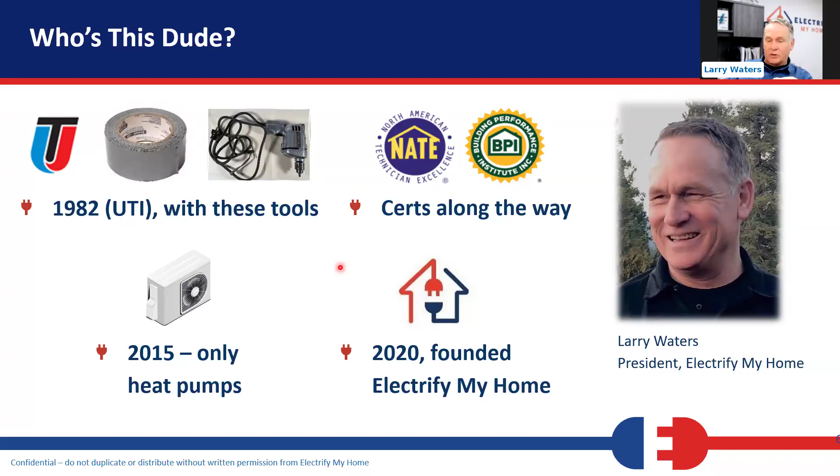I share our mission statement with every class and every customer, which is providing the most efficient, cost-effective solutions, practicing responsible load management, and training and influencing other contractors to do the same.

That's the introduction. So we're going to talk a little bit about the electrification market in California, marketing opportunities, whole house electrification planning, and the importance of designing these systems right so they work, especially in retrofits. When you're remodeling a house, it's hugely important that we look at the things that matter to the comfort and energy efficiency of the home, now more than ever, because comfort is something that's a little harder to deliver with a heat pump, but it's a completely different comfort. And then duct design, install, and commissioning - we got to be able to fit these things in there, folks.

Our Trade Pro series is designed to give you a crash course on electrification - let you know how we got here and where we're going, pinpoint enormous business opportunities, and open your eyes to better ways to serve your customers. So what's the backdrop in California? We've got an hour for this one.

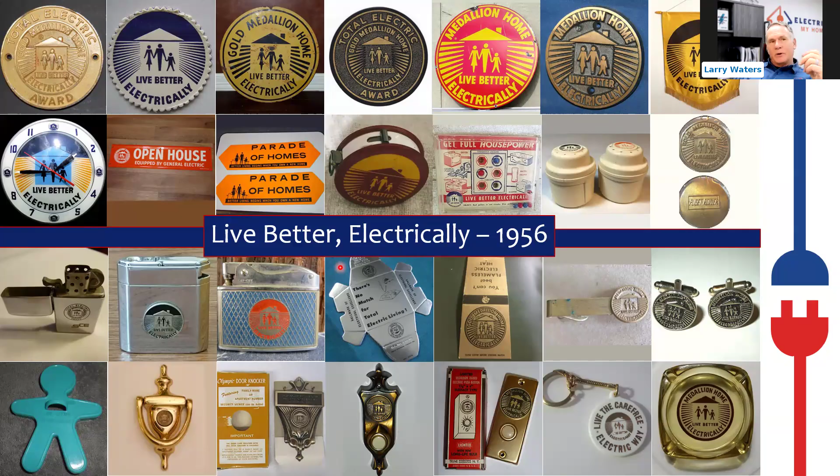Electrification has been around for a long time. There was a massive electrification movement early on in society when we were consolidating electrical systems, and these companies were building out these big electrical systems that were more than just a couple of blocks - that was kind of the first lead. Then they needed to sell more kilowatts to build out the systems, and at the same time a lot of cool stuff was happening, like vacuum cleaners, washing machines, televisions, and all these new motorized items that ran off electricity and made your life better. That was presented in the early 50s through the early 60s as 'live better electrically' - let these electrical things make your life easier.

Some of the policy decisions and things we're living through right now have been going on for a while. In 1963, the first Clean Air Act was amended. So this is not new. This is as old as I am.

All the way up to the more recent stuff, which is AB 32, the Global Warming Solutions Act in California. That required California meet or be below 1990 levels of carbon emissions by 2020. They were beating that pretty well and knew they'd get there. So in 2016, they said, you know what, we can do better. And so they set SB 32, which was to get 40% below 1990 levels of carbon emissions in buildings by 2030.

This is what's pushing electrification now. We are in the second month of 2026, going into the third month of 2026. A lot of this was happening around a time where there were some things happening in California, namely COVID, people not going back to work for a while. All these things happened to slow the pace, and now we're really up against a huge goal.

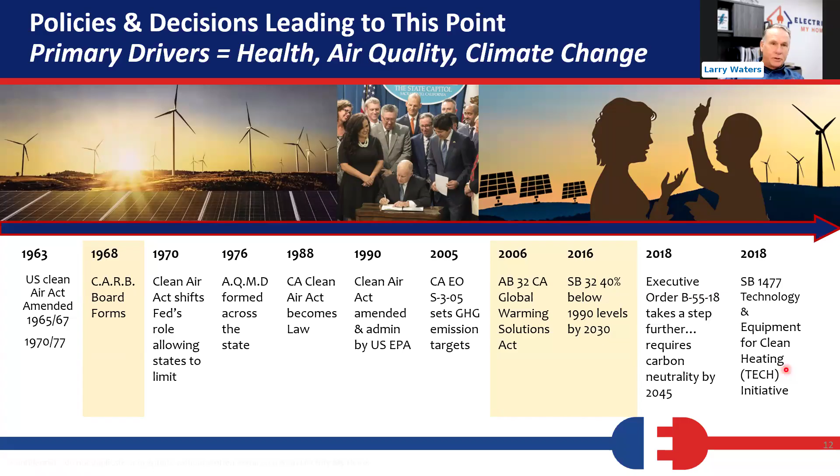Executive Order B-55 required further carbon neutrality. In 2018, SB 1477 was put through. That's the original Tech Clean California program. That's a really great program for moving this along and making people aware that heat pumps were a good option, and so they kind of did their job. Tech Clean is still around, with a lot of other people getting in the mix now, including the Energy Coalition and South Coast, and we're happy to be part of that.

We need to make sure that our customers are aware of where this is going - that gas furnaces and gas water heaters all over the entire state of California will no longer be available after 2030. And then in the Bay Area, it's 2027 for water heaters and 2029 for furnaces. So we're pushing it really close, and I'm up here in the Bay Area.

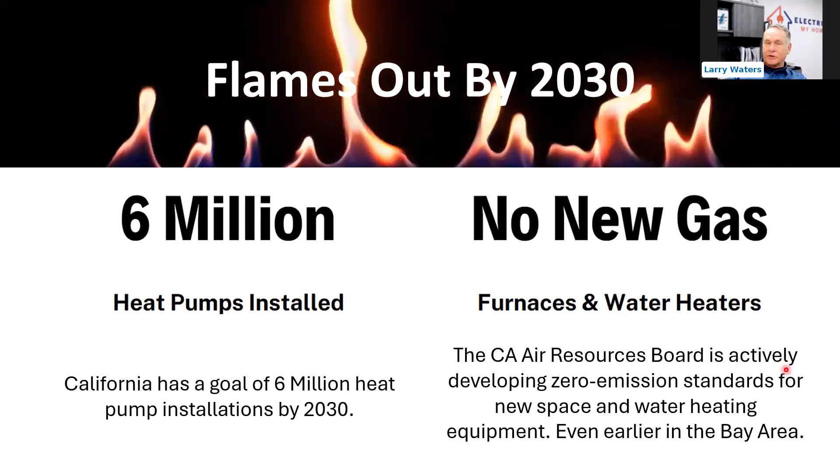All right, 70 cities in California have enacted building codes to phase out gas in new buildings, and this has been going on for quite a while. But now the whole state's going to do it. So it's going from 70 cities to the entire state.

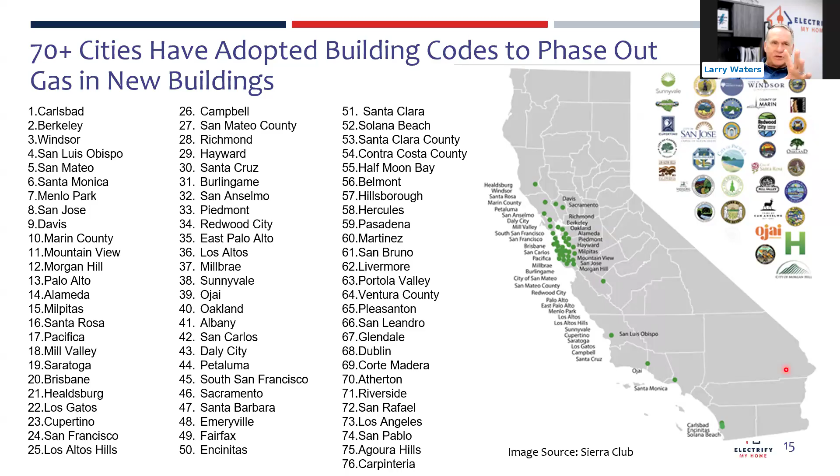So why the electric resurgence? What is it that is driving all this, right? A lot of people automatically go to the climate change thing because it's been high in the vernacular for a number of years - everything's kind of related to climate change, and this is related to climate change in the benefit that we'll get, but it's really about air quality.

So California has a lot of stuff to be proud of here. We've got Yosemite, the Golden Gate Bridge, beautiful cities, Hollywood, all the cool stuff we have. But we're also the proud owner of 8 of the nastiest, dirtiest, most polluted cities in the country. So we need to fix this problem.

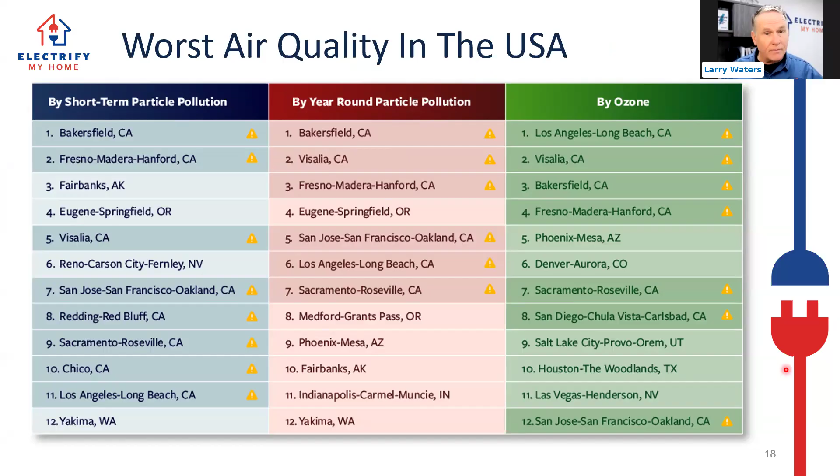And the way we fix this problem is we reduce emissions in buildings. Buildings present as much of an issue in highly populated areas as vehicles do. The difference is we can go with an electric vehicle and everybody can see you driving it around - that's kind of cool. But if you replace your vehicle with an electric one and you keep gas in your house, it's a net negative.

We can get the gas out of the houses, we can reduce more carbon, and we can increase the value of the house. Because any car you buy, as soon as you drive it off the lot, it's worth less money than it was the day you bought it, right? So by getting the carbon out of the houses, we can have much better impact and not as much drag on the grid. Also, a lot less energy is going to be used by heating and cooling homes and heating water than by charging car batteries, although we're going to be electrifying everything at some point.

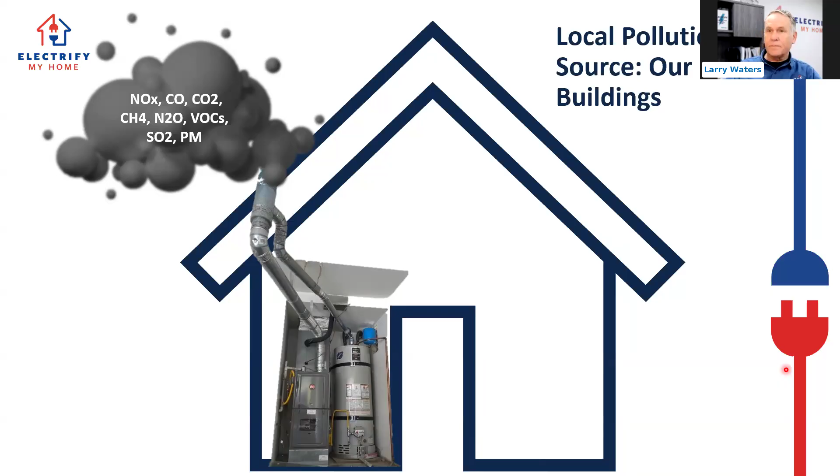All right, gas stoves - man, gas stoves are like a political football, aren't they? So I can't see your hands, but just raise your hand in your mind, visualize raising your hand, and say, hey, I've got a gas stove in my house. What are the reasons why you would want a gas stove over an electric stove?

Some of them use gas because that's what everybody has. But realistically, 70% of the stoves in the United States are already electric. Most people have an electric stove. When most people think of electric stoves, they think of that one with the coil on top that glows red hot, and when you turn it down, it still stays hot. It doesn't have good temperature control.

But now we have great technology around this called induction, which uses magnets to cook. Maybe everybody knows about that, but if not, go look at a video on YouTube about induction stoves. You'll find that they cook better. They don't produce any heat amongst themselves, they just heat up the pan. So they keep the kitchen cooler and reduce pollution like crazy.

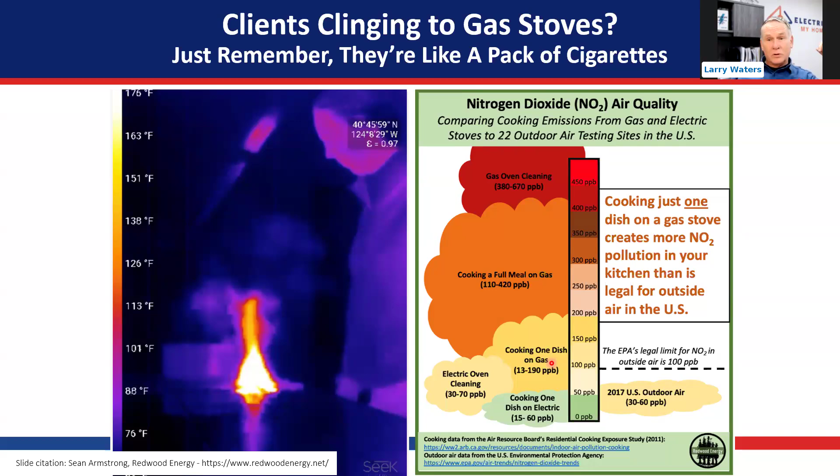One reason is that some of this stuff is heavier than air once it gets going, and it falls down to where all the little kids in the family are. Research found that child onset asthma is 40% more likely in a house with gas cooking. That should be enough reason to consider an induction stove anyway. Induction stoves are just way better, man — it's like moving from the Betamax recording system to TiVo to online streaming. It's just way better.

Okay, the tide has turned on heat pumps. Heat pump sales are now outpacing gas furnace sales. For a long time, all the way up to 2020, heat pumps just weren't a thing because people didn't realize they could even use one. Most people didn't know what a heat pump was — they lived with a gas furnace all their lives.

Heat pumps are better, and the word started getting out. After 2020 to 2022, gas furnace sales were kind of keeping pace, but a lot of heat pumps were still being installed alongside those gas furnaces. Then around 2021 and a half, heat pumps really started outpacing gas. This had a lot to do with California's TECH Clean California program and other state programs emphasizing heat pumps, along with incentives for doing so. Then it became like, hey, heat pumps work pretty good.

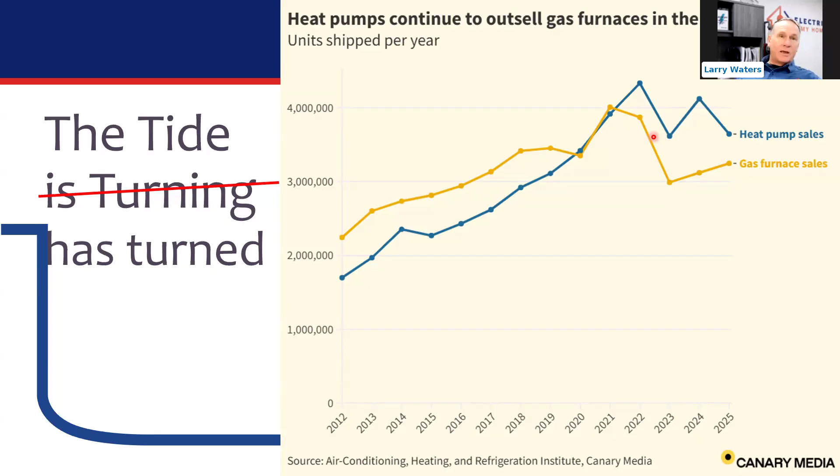Gas is no longer a good investment. We crossed that Rubicon line last year where having a combination gas-electric house will always cost more from here on out rather than a properly installed heat pump system. Now, all of these statistics assume these heat pumps are installed correctly, and unfortunately, not all heat pumps are installed correctly. So it's really important that we do this right.

So gas cost is going up, but so is electricity, which is why we need to electrify things super efficiently. Experts have been talking about this for years — since I've been paying attention back in 2015, 2016, 2017, the conversation was really coming out there. They did all kinds of research studies and found that as fewer and fewer people buy those therms of gas, the majority of the cost of that gas becomes the delivery.

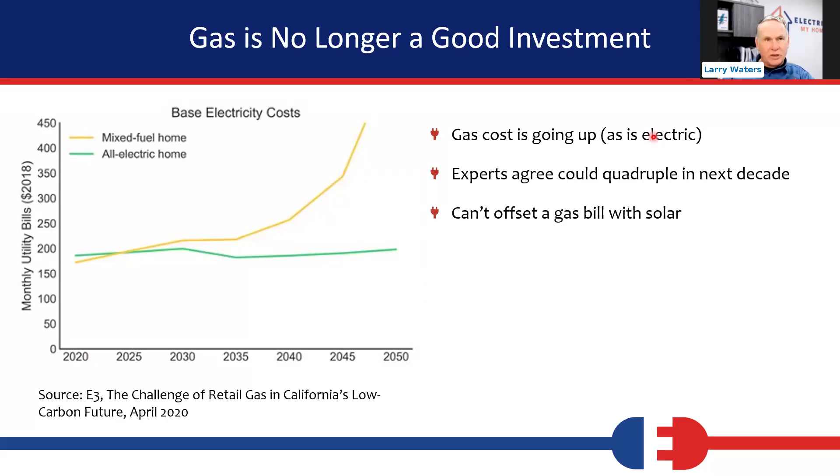When you don't buy that therm of gas anymore, we have to raise the delivery cost because the maintenance of the system isn't going to go down. It's just simple economics, folks. It's going to cost more to have gas as fewer people are buying it. You can't offset a gas bill with a solar panel. So if you put gas back into a house, that customer is going to have that gas for a while and they're going to suffer those higher prices. So we need to look at heat pumps as an opportunity in every single application right now.

Remaining gas customers are going to share the cost of the pipeline maintenance. Gas heating systems in homes will be a liability when selling. Once there's this 2030, or 2027-2029 in the Bay Area, nitrogen dioxide and nitrogen oxide regulations go into effect, it's going to be a liability when you're selling a house with gas in it. The worst thing somebody could do is say, 'Hey, I want to save money by putting a furnace in and a gas water heater,' because it's cheaper to put gas systems in. But when they go to sell their house five years after that, once the nitrogen dioxide rules are in place, the savvy buyer is going to go, 'Oh, this house has gas in it. I'm going to have to put heat pumps in here. That's going to be very expensive.'

So putting heat pumps in now avoids the cost shock of that difference in time as well. Because I can tell you what, it's going to cost less to put one in this year than it will three or four years from now, because it's just gone up and up and up. And it's not necessarily the equipment cost, a lot of it is the cost of ownership of businesses and employing people.

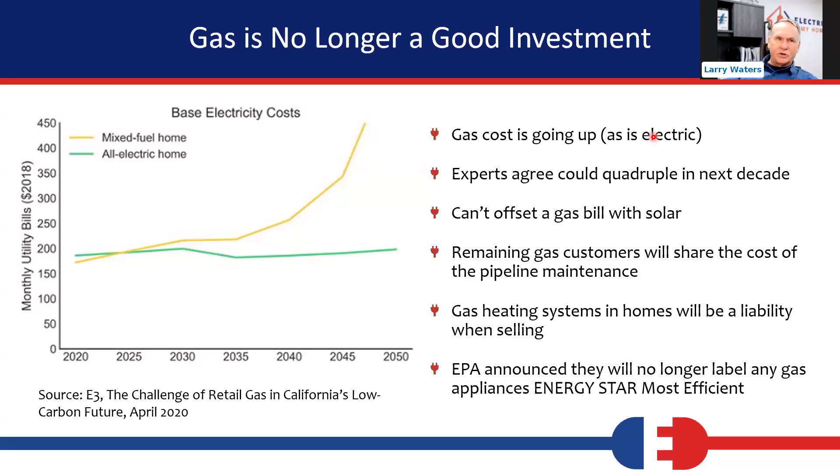The EPA announced they will no longer label any gas appliances as Energy Star's most efficient, because there's an electric solution that's more efficient. Public sector investment is shifting the conversation here.

And one of the major turnabouts in California was this Switch Is On website. They put this together a number of years ago. It's a contractor-based page. Customers can go in there with their zip code and look up all the incentives available in their area, and they can really optimize. It gives contractors an opportunity to brag about the electrification work they're doing, and it gives customers a place to find contractors that are doing it, so they don't just wing it and take a risk on somebody that's going, 'Yeah, I've never really installed a heat pump, but I've been kind of curious about that, I'll do one on your house.' Don't do that. Find somebody that knows what they're doing, has good reviews. Customers should look at the reviews - does it say my bills went down or my bills went up?

A lot of it is because of this thing called the duck curve. If you haven't heard of the duck curve, I'm going to try to explain it to you in under a minute.

The California independent system operators are making graphs all day long of how energy is going to be used during that day, so they can apply the right amount of electricity to the grid to equal what people are going to use. They do a lot of that based on assumptions around weather and patterns. We deliver the least amount of power overnight - obviously everybody's sleeping, we don't use a lot of power when we're sleeping. Then everybody wakes up in the morning, we get this little morning peak ramp - lights are coming on, things are happening in the house, start using more energy. Then the sun's coming up over the horizon, starts activating all these solar panels everywhere. All of a sudden, all the solar panels come online, and it makes it look like a drop in demand. These are big curves that the independent system operators now have to deal with - like, I got to provide all this power up to this point, and then somehow I got to rein back all that power. Otherwise, all this solar energy coming onto the grid could cause us to overpower the grid, which could damage it and cause all kinds of other problems. So their job has gotten a lot harder over this, and every year we add more solar, it causes this situation to be exacerbated.

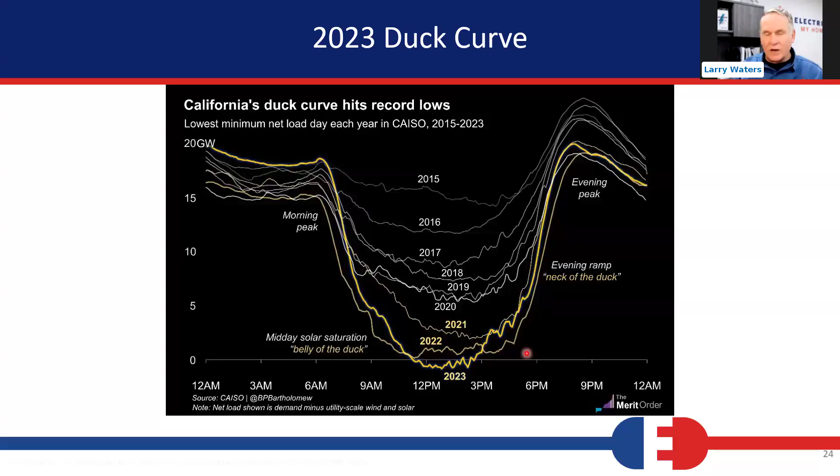So what can we do about that? It gives us an opportunity for innovation. We saw a cool thing yesterday - one of the major manufacturers is now building an inverter heat pump system with an integrated battery. Alex and I in my office have been talking about this for a few years, dreaming of building a battery that can hang on the wall behind the heat pump. Well, one of the manufacturers is now doing that.

So what can we do? We can help use more of this power during this time and reduce our use during that time, and that's going to help steady up the ramp. One way we can do that is put in heat pump water heaters. We can program them to preheat during the day when energy is inexpensive, and if somebody's got solar on their roof, it's going to come right out of the solar panels into the hot water, which is amazing.

We can preheat our water. We can preheat and cool our houses, which is counterintuitive to what people know - like, I want to save energy, I'm going to leave it off all day and turn on my air conditioner when I get home. Bad idea, because power is 30% more expensive between 4 and 9 now. We don't want to run our air conditioners then.

A better thing to do is preheat and pre-cool the house and set it back or set it forward depending on the season. If it's summer, set it up a few degrees at 4 o'clock, let the house glide through 9 o'clock, then start cooling it back down again. The only way you're going to be able to do that is with particular type systems and paying attention to the actual house, making sure it's efficient.

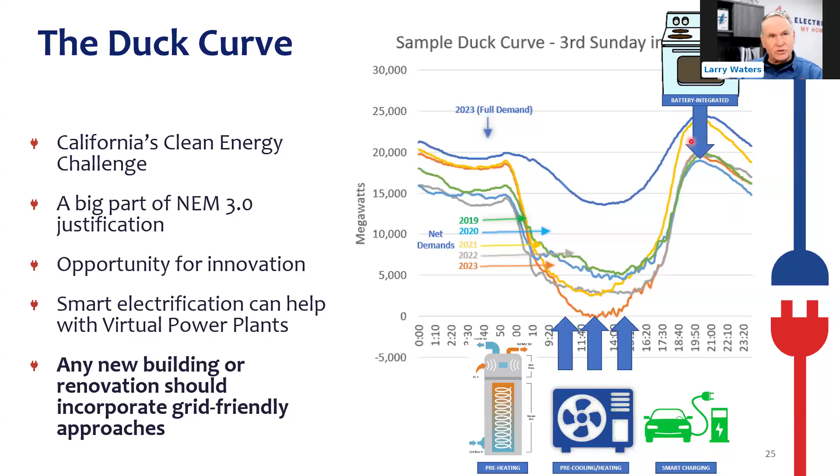And then we could do things like battery integrated stoves, since we cook during that peak hour. There are battery integrated stoves out there that have a built-in battery that runs the stove when you're cooking and charges later when power's cheap. I have one in my house - it works pretty good, pretty nice stove.

All right, what are some of the other benefits we can get from correctly designed electrification upgrades? This is more HVAC focused, like getting rid of the furnace and putting in a good heat pump. With a good, well-designed heat pump - like an inverter style heat pump system designed specifically for the house, taking into consideration the loads, like doing a load calc on the house, which I'll show you in a second - it can provide extreme comfort, like comfort you've never felt before.

My house is always the same temperature, and you barely hear the thing running. I hear from my customers all the time - oh my God, it's so quiet, my house is the same temperature in every room.

It's environmentally friendly for those who care about that - like everybody should. It's better for the environment because I don't have all those nitrogen oxides going out into the environment when I'm running that system. If I fully electrify my house, I can disconnect from the gas line, and all those micro leaks in our gas systems are way worse for the environment than just the exhaust. So by getting rid of that, we're helping the environment a lot.

They're safer because furnaces - you might look in the newspaper and see a $29 furnace safety check. You don't need to safety check a heat pump. There's no carbon monoxide that could potentially come into your house and make you sick. There's no more gas, no more flame. So it's way safer for your family.

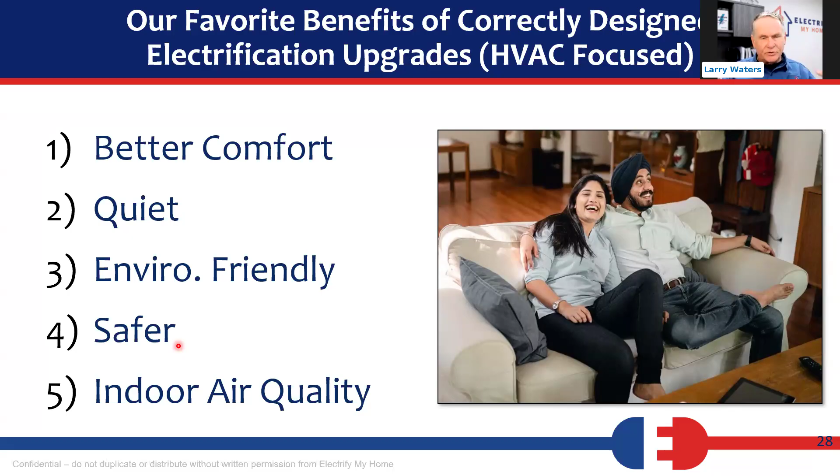And because a properly sized heat pump system runs longer, I can get extreme air quality out of these things by running them over a really good filter. Instead of having 5 to 10 minute cycles like a standard system, my system runs for an hour using a tiny bit of energy, very slowly, pulling particles across those filters for long periods of time and really getting the air clean in the house.

So here's a big question for architects and general contractors: are our new homes comfortable? In the last couple of years we've gone and looked at a lot of houses - I'm kind of a house nerd, so I've looked at a lot of new house construction just in my area. Some of the builders are doing some pretty amazing stuff.

Some of them are doing closed cell foam underneath the roof assembly, so the attic is like a semi-conditioned space - I don't have all that heat at the ceiling, I don't have all the radiation - and they're putting in more closely designed systems that are making the house more comfortable in the last few years. But up to this point, they really haven't been, especially when we have gas appliances.

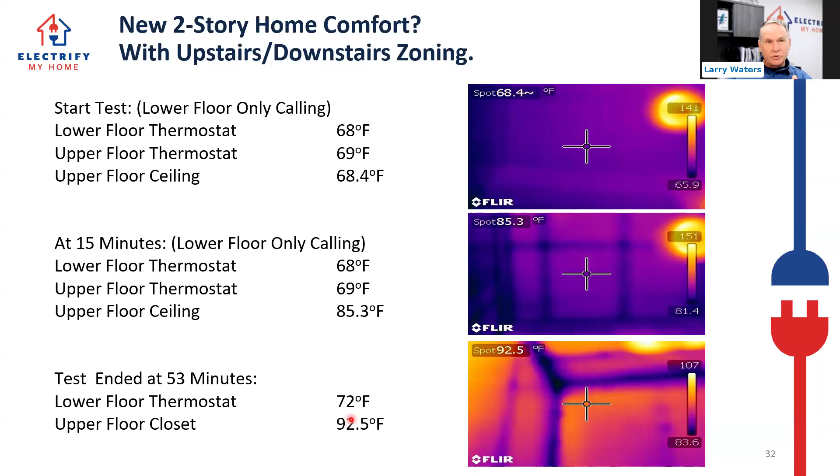It's going to heat up things that are higher. Heat pumps don't do that. Heat pumps generally heat with air that's closer to room temperature, especially if you put the right one in. It'll give you 100-degree air when it needs to, but it's also going to give you air that's very close to room temperature when we get close to set point, so we don't cause these problems. So this solution can be fixed with heat pumps done correctly.

Okay, new home air leakage. California Energy Commission commissioned this report. This gentleman named Rick Chitwood - I don't know if anybody knows him - he's a legend in home performance in California. He figured out a lot of stuff, this guy.

So what they looked at was, where are houses leaking and where's everything going? They found that the attic space is where most heat is leaving, because the heat rises and pushes up against the ceiling, leaves through the attic. The garage was responsible in several houses, and then other leakage was just around doors, around windows, wherever else it's going to leak through the vent fans, whatever. But 47% of all the air leakage in the house was going through the ceiling. So if we take care of the ceiling, we can knock a big number off of this thing, right?

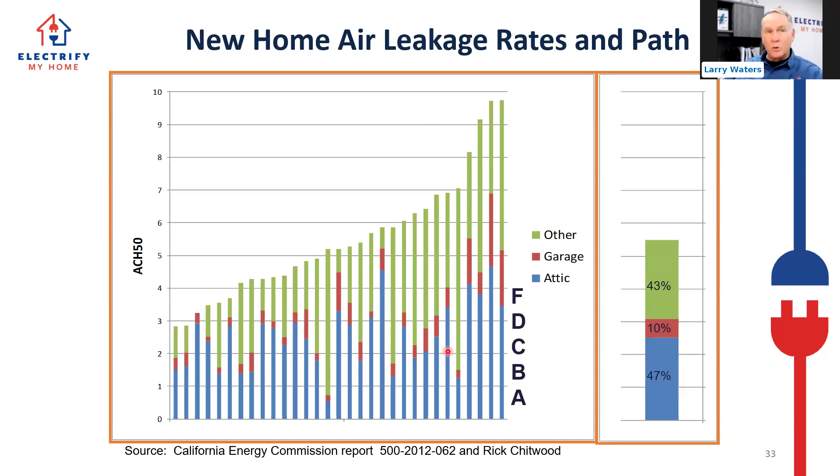And if air leaks out of the ceiling, it has to come in from somewhere else. So if we slow down the leak at the top, we'll slow down the leakage at the bottom.

All right, so this was leakage at 400 CFM per ton. Basically, they're looking at an ABC grade down here. Single family homes did have the best grade. This is 5% duct leakage. But what they found when they were starting to look at apartments and things like that, and townhouses, there was a lot of leakage in these systems, because they have different testing requirements and they're kind of connected to each other. But we can do better on that. And the requirement for 5% leakage is really - it should be tighter than that, right?

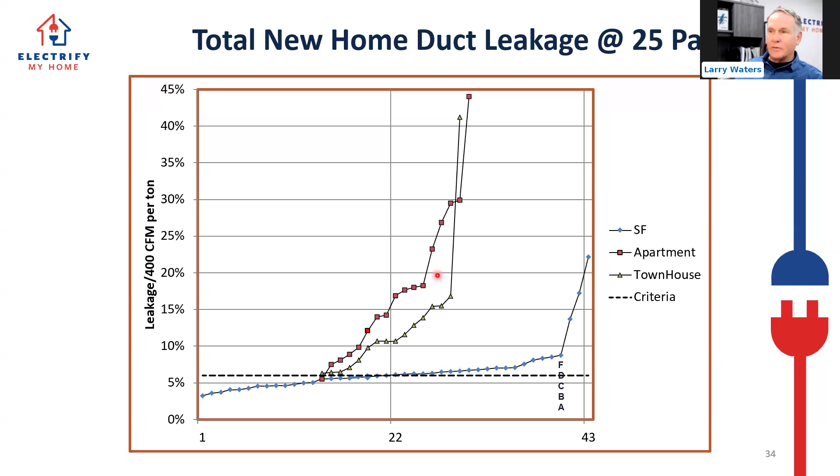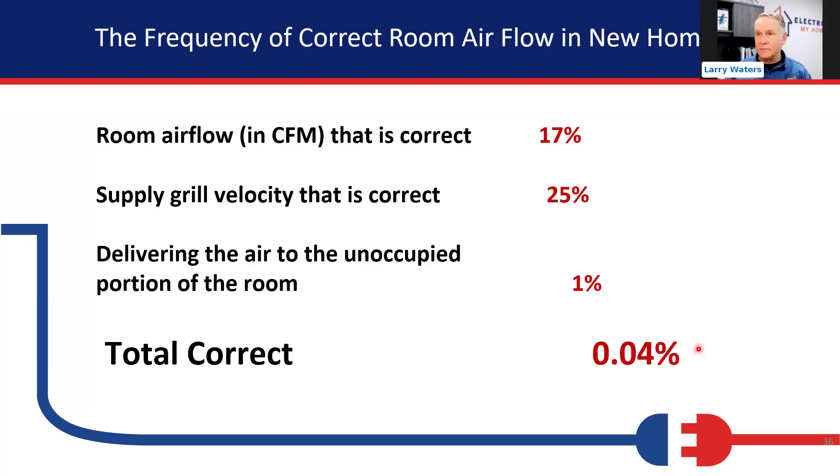Okay, so your duty to your client as a general contractor, an architect, or even an HVAC guy is you're their trusted advisor. It's not advisable, from what you've already seen, to recommend gas at this point. A lot of California right now, for the furnaces we can install, are called ultra low NOx or ultra low emission furnaces. The manufacturers only build those furnaces for a small part of California and parts of a couple other states. So when California does away with those furnaces and says no more furnaces, those manufacturers are not going to be supporting those products that are only being sold to these areas.

So by putting one of those systems in for a customer now, we are potentially setting them up for a furnace that might only last 5 or 6 years before they can't get parts for them. And boy, with those furnaces, do they need a lot of parts. We do a lot of training, a lot of contractors get in front of us. I've never heard any contractor in 4 years that we've been doing this training say that they liked low NOx furnaces.

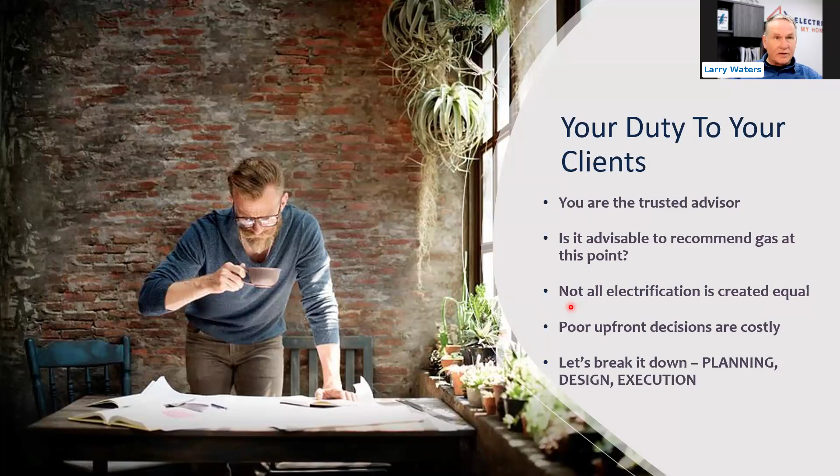So planning, design, and execution are super important. You need to learn more about these things. Keep going to these classes. Go to our 3-day class. All right, so planning—what are we going to do about planning?

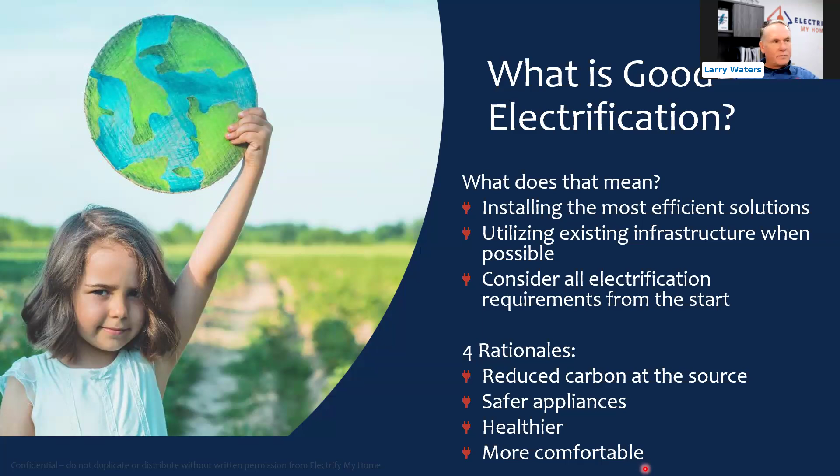You used to have a flip phone. You used to have a car without a computer in it, or without advanced cruise control. You used to have all these things, but you've changed away from them because they're safer or more efficient. That's the same thing we're doing to people's houses. We're getting rid of the gas to make it the next logical transition of technology in the home, no different from going from a tube TV to a flat screen.

Now most people are on their fifth flat screen and they're getting bigger and bigger. Do you really need an 84-inch TV? It sounds kind of cool. I don't have one like that.

Then we have to consider the electrical infrastructure. If you're an architect designing a new home, the new standard is 200 amps. But if you're remodeling and just doing a panel upgrade because you're putting in electric appliances, that's great that you want a new, safe, modern panel, but do we really need to increase the amount of power available? When you increase the power available, it requires a lot more in-depth conversation and work from the utility company, which can stall out a project for a while.

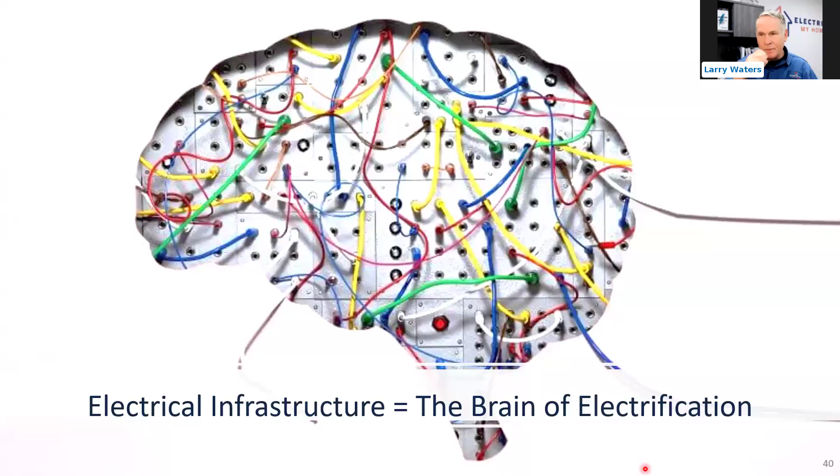So we want to look at our electrical infrastructure for what it is and figure out what we can do with it. There's a lot of power in 100 amps, a lot of it, so we can get a lot of work done.

Heat pumps are the heart of electrification. We've got the brain, which is the electrical system, and the heat pumps are the heart of it. We can't do efficient electric heating without a heat pump, but we can do very inefficient electric heating with a heat pump if it's the wrong one, installed by somebody who just pops a new unit in without designing it correctly. Make sure you use the right heat pump for the right application, installed correctly, and don't fill your brain—or your electric panel—with a bunch of garbage.

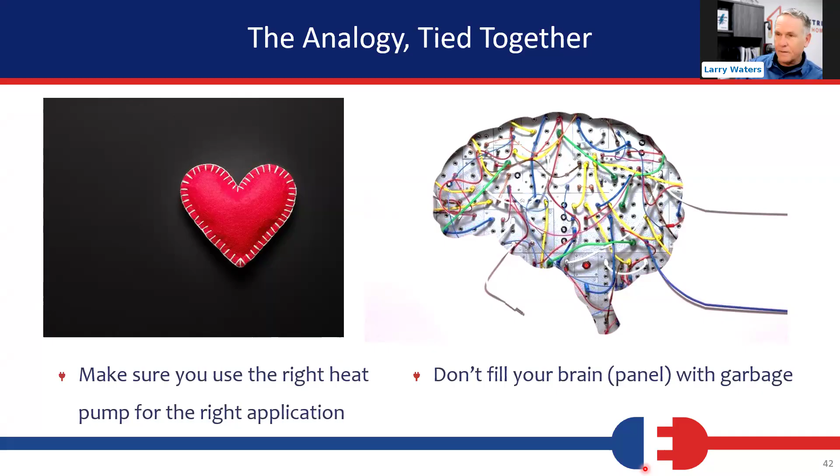Assume all homes will eventually have an EV charger. Talk to the customer about the electrification plan, which you'll help design, and determine the panel needs up front. Then consider other things besides amperage increases, like smart devices and things like that. Don't leave them with surprise panel work down the road.

We see this all the time, and we teach this in our classes: if you're just adding a heat pump water heater to an existing panel and you've only got two spaces left, what do we do? Do we take those last two spaces, yet the customer still needs a heat pump and might want an electric stove and all that? Do we do that, or what are some of the other options we can use?

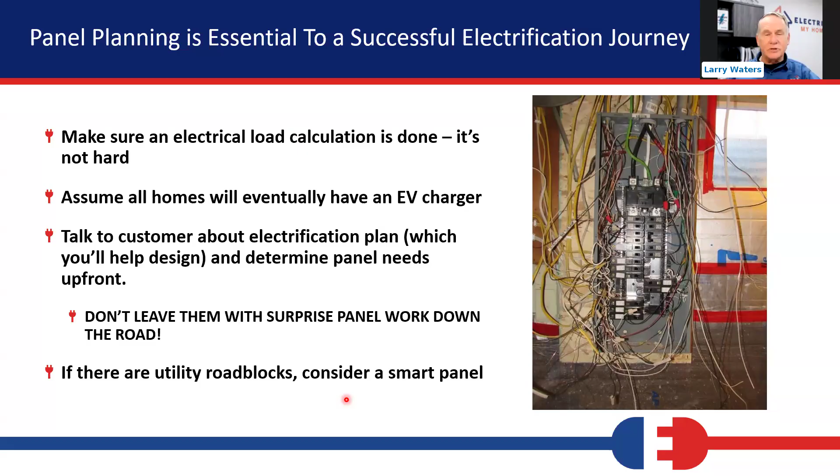If there are utility roadblocks—meaning the wire coming in from the street is extremely expensive to replace—and they're telling you the conduit isn't the right size, so you've got to pull new conduit to get the heavier wire through for 200 amps, that might be 10, 12, 15, $20,000. And depending on if you have to cut across somebody's landscaping, that adds even more cost. So there's a lot of cost involved. Consider using something like a smart panel, a switching device, or a circuit pausing device instead.

Okay, so here's some examples of some things that didn't go too well. This is a house in Richmond, California, in the Bay Area. This house started with all gas. They called a contractor out who, during the rush of contractors becoming electrification specialists - the only requirement was there was a rebate - put a heat pump in a house that only had gas before. They had a gas mentality, thinking I better put a big heat pump in to equal the capacity of the old gas system, instead of making the house more efficient.

So they put the heat pump in, and in order to get this heat pump system in there, they had to put a new panel in. The third project is when we got called in on this. They wanted a heat pump water heater and power ran to their stove and dryer, and they were getting batteries and solar at the same time. Because they were stuck with this heat pump system that cost them a lot of money that they didn't want to replace, they had to then upgrade the service amperage to the house with another new panel. So two panels in a few years.

So multiple panel replacements, oversized HVAC. When they sized the solar, they sized it to the oversized HVAC, which wasn't set up right - it was using way more energy than it should have, so they got way more solar than they needed. If they would have dealt with a company that was savvy on all of it and could have advised them on the whole thing, they could have got one panel upgrade, a smart panel, downsized the inverter to actually match what the house's needs were, and not have six breaker spaces - only two, 20 amps instead of 70 amps. Then they would have needed smaller solar, and wouldn't have needed a second panel. This customer could have saved $25,000.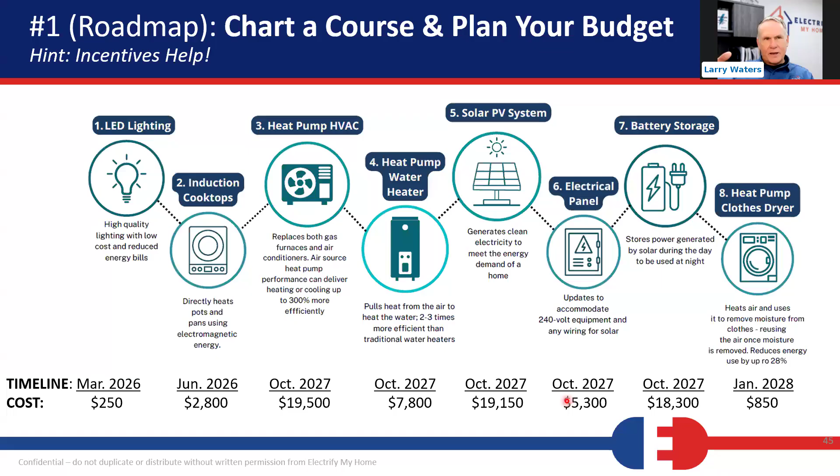Maybe they're going to get battery storage, maybe then they need a panel - we don't know. Maybe we want to put off the panel until we do some of the other work and get the process started with the utility company, do our stuff, and then upgrade the panel after we've done our work, so it doesn't break the flow.

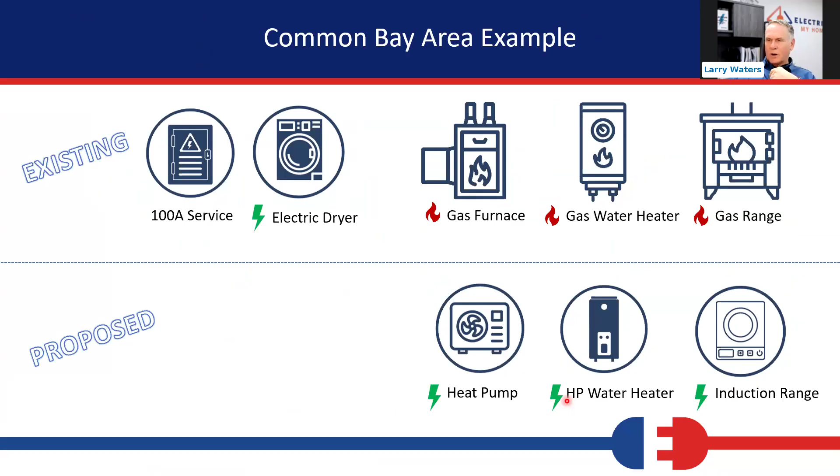Okay, so here's some common Bay Area examples, probably similar to a lot of areas down in Southern California as well. 100 amp service - they have an electric dryer and everything else is gas. So they want to put in a heat pump, a heat pump water heater, and an induction range. So what are we going to do?

So we keep the panel in place. We specify a low capacity heat pump split, change out the dryer with a heat pump, put in a heat pump water heater, or split the dryer with the heat pump water heater - take one circuit and use a splitting device and run both of them off of one circuit. They just can't both run at the same time. There's cool devices out there for that. Pre-wire for the future range, tell the customer to save up for the solar or the EV and eventually get a new panel. That's one good scenario.

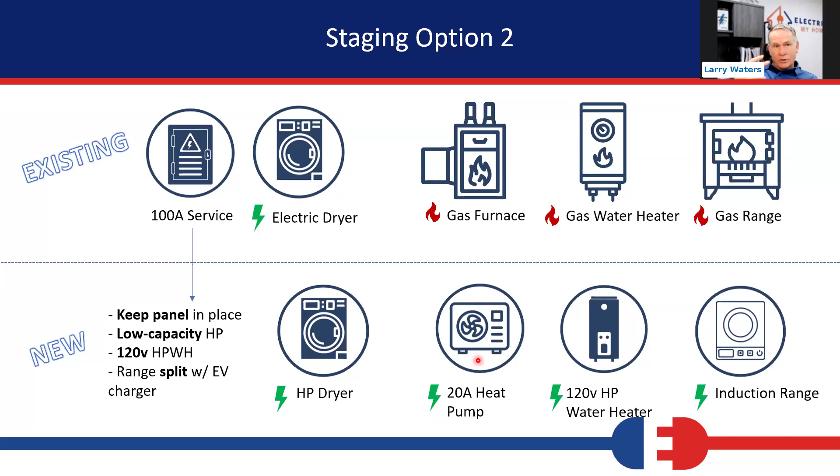There's another option, same thing. Maybe they're going to go with a heat pump dryer, and we're going to put a heat pump in where it's a 20 amp breaker that runs the whole machine - the outside runs the inside. So I only need two spaces, two very small spaces on the electrical panel.

Maybe I do a plug-in water heater because I don't have enough space in the panel, so I put a 120-volt plug-in water heater in. Just make sure you size it right. Then we can get the induction range, or maybe they want to go with the battery range. There's a lot of different options where we can keep the customer on their existing 100 amp service by installing these low energy appliances. We also call this watt dieting, if you haven't heard that.

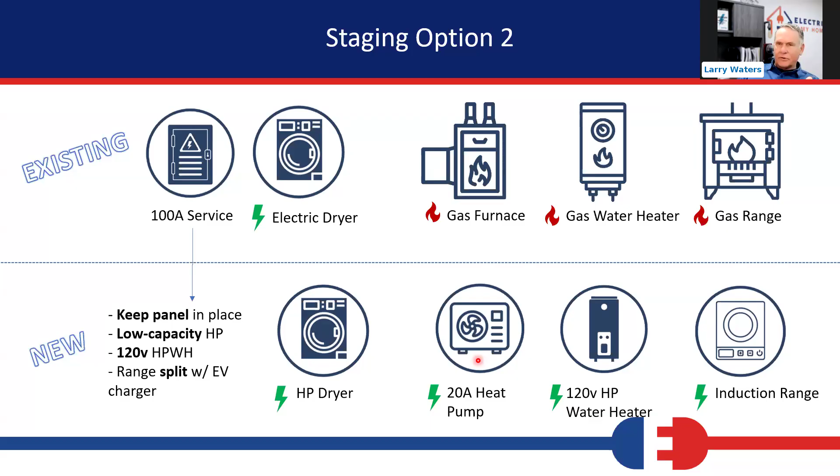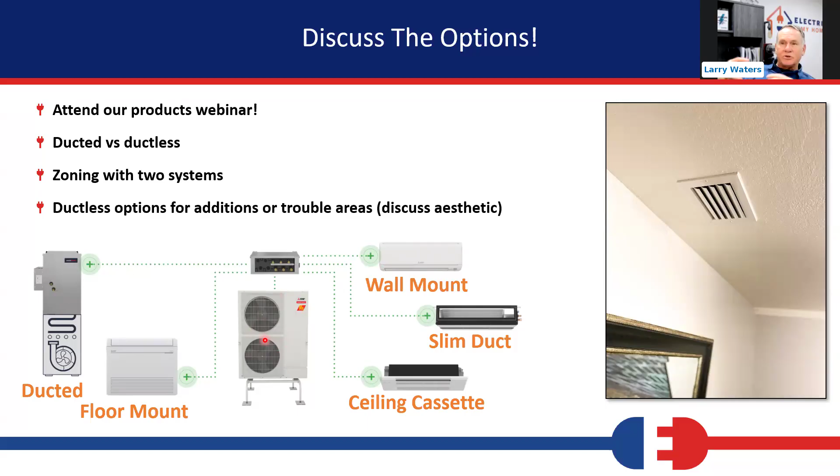Avoid the value engineering, man. The value engineering is killing this stuff.

Include the HVAC design early on. I know there's more regulations about this now. I remember when we'd go out to a house, the GC would have the floor in, and he'd call us and say, come give me an estimate on air conditioning this place. The way the house was being built, there was no way to get ductwork anywhere, and we had to scrimp—there was no way to get the correct airflow to the rooms. We need to engineer this into the design of the house to make sure we have enough space, but also enough space to get enough air into each room.

These are long-term decisions. I've been limited on projects by an interior decorator saying you can't put that grill there. I said, well, would they rather have that grill not be there, or be uncomfortable in this room because it's the only way we can do it? Architects on the call have probably heard that—I don't want to see that grill where the air goes in. Well, you can put it way over in the corner, but that's too big, I need a smaller one. You put a smaller one on, it affects the way the system operates, it costs way more to operate, and they're not going to be comfortable. Then it's, oh, I have this beautiful home, I can't see any of the stuff, but the place doesn't cool down.

Thermal comfort and health outcomes are equally as important as aesthetic comfort. So in other words, you're going to have to see some of this stuff. You can hide some of it better, but reducing return air sizes because you don't want to see a grill somewhere is a really quick way to an uncomfortable, energy inefficient home. We need to get that message across.

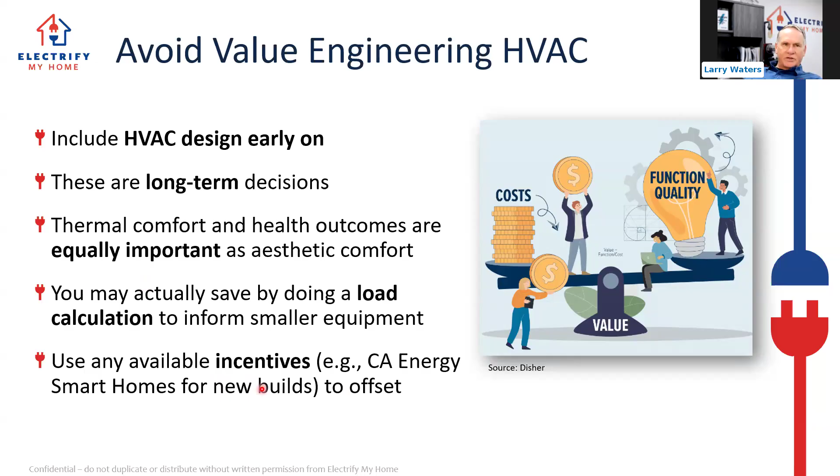These are available in all sizes. They're quieter, more efficient potentially, and more discreet. And they're gonna meet the requirement of smaller lot lines or city regulations about space on the side of the house. We work in a lot of really heavy dense population metro areas, and those metro areas have rules around these things, not only about size and distance to the property line, but also sound.

But these systems are going to be more apt to turn on and off more. We want systems that are going to run a long time and use a little bit of energy once they get the house cool or warm. So traditional systems - you might be talking to a general contractor, and you might use a subcontractor that just likes to put basic stuff in, so there's a little bit more money we can pull out of the job. That's great, let's just upsell the customer on a good one and then have a little bit more money off the top of that, right?

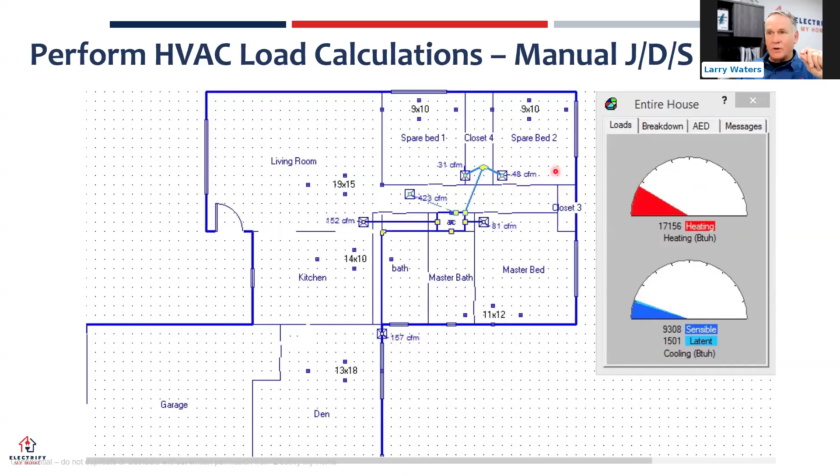If you look at these two rooms, they're both 9 foot by 10 foot. This is a big deal - one of these rooms needs 50% more air than the other does. Why is that? It's not because of the way the house is facing, it's not because of the window, it's because this room has two outside walls. Mother Nature is on two sides of that room, so it needs more conditioning.

So what most HVAC contractors are going to do - and I know this because we ask the same question in all our classes, and everybody guesses wrong - these are HVAC guys taking time out of their career to learn more, and they don't understand this basic thing. Some do, but most don't.

If I put the same size duct in both of these rooms and deliver the same amount of air in both, which is usually what happens if there's no load calc because they're going, 'oh, this is the same size room as that one' - if I don't have the ability to put 50% more air in here, or I put 50% more air in here when I don't need it, it's going to cause conditioning problems. Either this room will over condition, overheat and over cool, or this room will under condition.

So it's really important that we put these in here with little valves on them to dial that in. That was that statistic I showed earlier - only 17% of the houses had the amount of air coming into the room actually matched to the load calc. That's crazy. We should be at 85%.

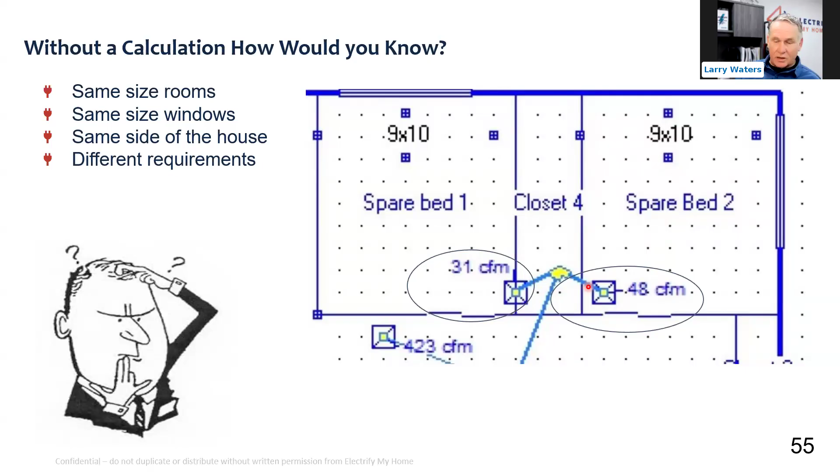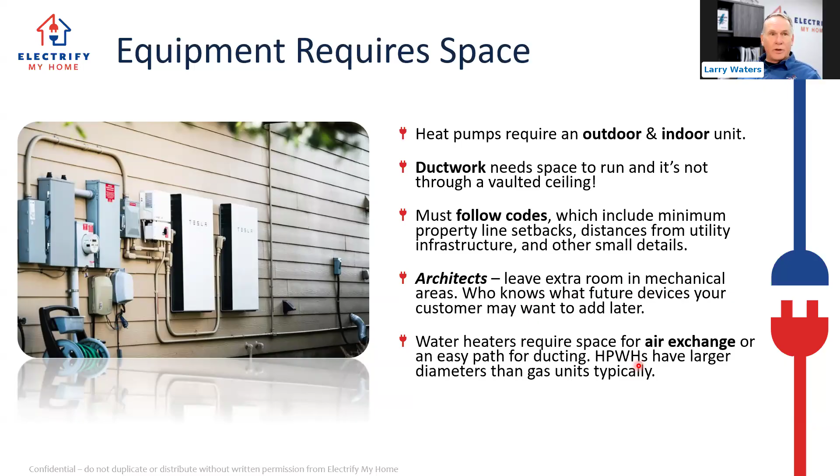So we need air for air exchange. If you're putting one on the inside of the house on the first floor of a slab house, then we need to worry about it.

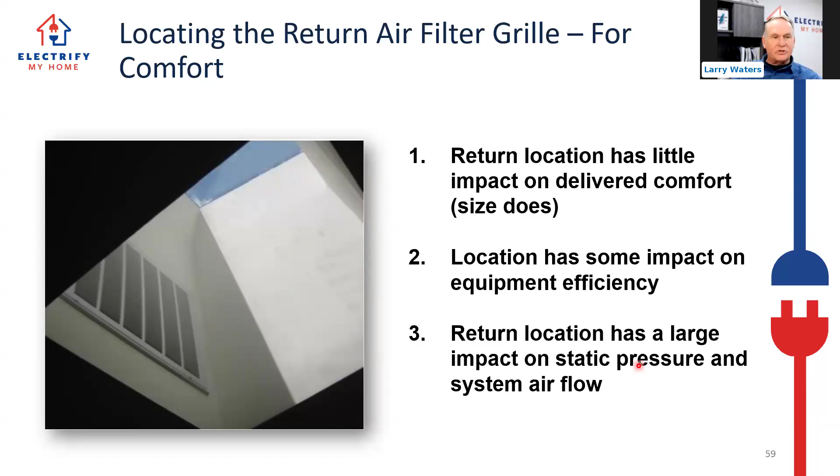Address the ductwork. This is where all the problems are. We can be really, really creative with these things. The return air, it doesn't really matter where the return air goes if we balance our system. This is not an air intake, it's a pathway for air to get back to the system to be delivered into the room.

Or my preference, always go ducted if we can, because then there's just a grill, all right? There's not a lot showing.

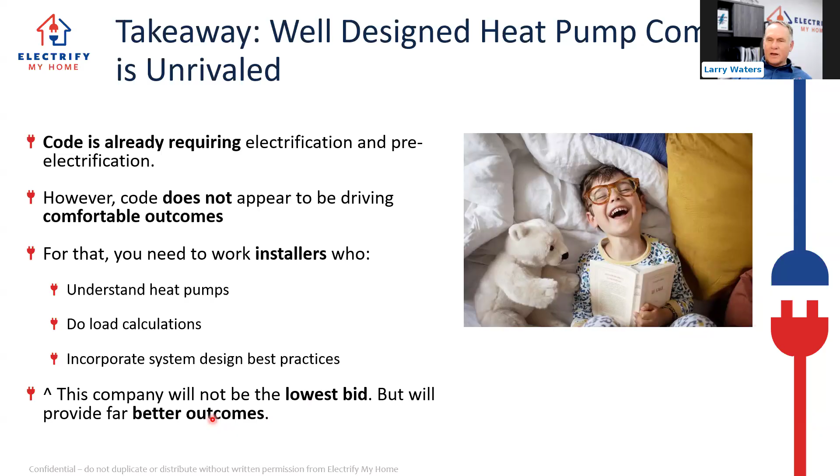So it's not going to be the lowest bidder, but you will have far better outcomes. And then you can ask your customers, hey, did I do a beautiful job on your house and your granite countertops and design? And they're thinking in the back of their head, yeah, but the house isn't that comfortable, right? We can make them comfortable too. So make your comfort as much of a standout as the kitchen, and you'll do well.